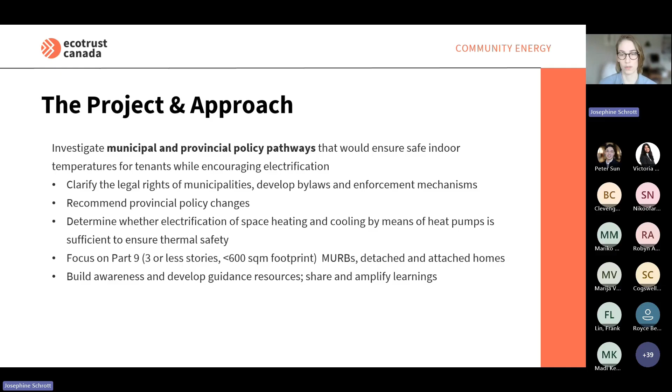And we did focus on Part 9, so smaller homes, small multi-unit buildings or single detached homes, just because there is also a lot of great work already being done on larger apartment buildings. And as mentioned earlier, in line with the fund objectives, we are looking to help build awareness and guidance resources and share that.

So this is looking very skewed to me, but basically our project was doing a lot of research to capture all that's come out since the heat dome around academic literature and learnings and studies, synthesizing that, and complementing it with expert interviews from various fields, particularly around tenant impacts.

Then we hosted a forum last year in the spring that had a session specifically on this topic, which allowed us to get further feedback from a diverse group of stakeholders. We sought input from provincial and municipal staff and elected officials, and then took all that to refine things.

And went into further details around the policy pathways. For each one, we looked at what's the status currently in BC and where it could go in future, what other jurisdictions are doing, and who has authority to move it forward. We looked more at municipal tools and started tracking action at the municipal level, since a few things were actually developing as we were doing this work.

And then this all went into the final project report. I can share the links in the chat after. We separately have an action tracker that we're keeping updated to track all the good work that municipalities are doing around this.

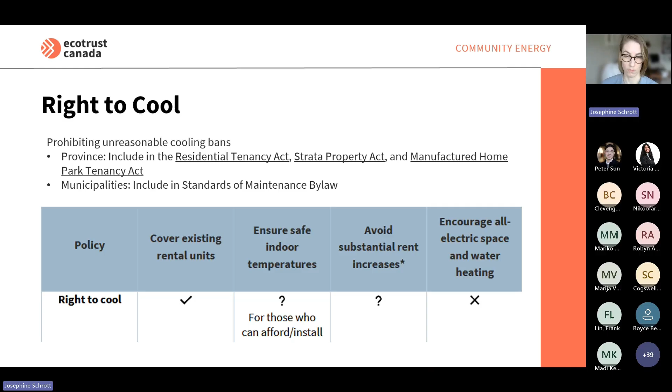Right now we're looking specifically at one of the key policies that has perhaps the most traction right now, which is the right to cool. That's really just prohibiting unreasonable cooling bans that folks face, both in rental units and in stratas and other setups. At the provincial level, the right to cool could be incorporated into the Tenancy Act and Strata Act, and municipalities can also incorporate it into their standards of maintenance bylaws.

Speaking of standards of maintenance, these broadly specify some kind of standard for healthy and safe housing. A number of municipalities in BC have those—not the majority, but a lot of them do. They're really an opportunity to include temperature limits. They all have minimum temperature limits or require some level of heating, so the idea would be to add a maximum temperature limit to require some level of cooling as well.

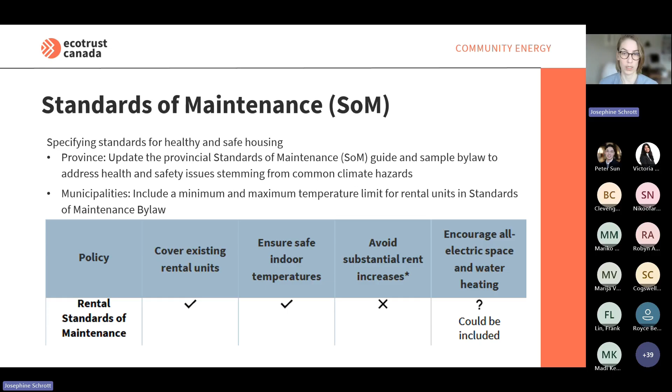The province is in here too because BC does have a provincial standards of maintenance guide and sample bylaw intended to help municipalities implement these standards. However, this provincial guide is from the 90s and really doesn't address the current climate-related hazards we're facing, so we're calling on the province to update it.

Other standards and codes that are a bit less directly focused on thermal safety or temperatures, but could also play an important role toward that goal in rental units, are, for example, the retrofit code and existing buildings renewal—really looking at how we can bring existing buildings up to better standards.

Similarly, rental energy performance standards, often measures that increase energy efficiency, will also have a positive effect on extreme temperature issues, particularly when done with those issues in mind. Then equipment standards, ensuring improvements at the time of replacing space and water heating equipment. The province does have highest efficiency equipment standards promised, but unfortunately not yet implemented.

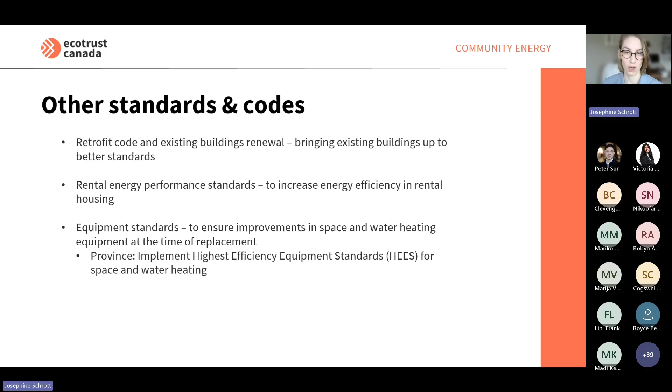A couple of things we thought were really important, particularly for filling data gaps and increasing transparency and information availability, include rental licensing.

We do have this at the provincial level for short-term rentals. The province could, for example, expand this to all rental units. Some municipalities have a licensing system, which gives a lot more information about where renters are, where the buildings are, and maybe what kinds of standards or maintenance issues can come up.

These are all kind of possibilities of tracking information and targeting interventions much more decisively and directly to the folks who need it most. Similarly, with energy ratings, these really help make visible some of these invisible elements of a home and provide better transparency for renters and buyers. This is something that the province could potentially require, and there's obviously an opportunity to include climate adaptation or resilience considerations in these kinds of labeling initiatives as well.

Just quickly on the province, we didn't get much enthusiasm in terms of our outreach to them. The Union of BC Municipalities resolutions on this matter also haven't really resulted in a meaningful response, and we do know that the province currently isn't considering changes to the Residential Tenancy Act or the Strata Act. It seems like they are currently willing to just leave the burden of proof and risk on individuals to make their case around the right to cool, rather than making that the default.

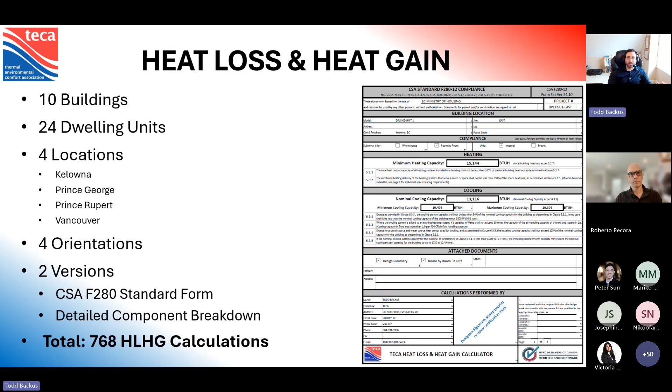Each of these 10 buildings has HVAC plans in 2 different styles. One has a centrally ducted forced air system, which a lot of us are very familiar with—you'd have your air handler in the middle of the room and your plenum with all your pipes coming off of it. I also included a mini split design that is separate.

The intent of that was that not all of these dwellings are well suited for a centrally ducted forced air system. Some of that is in large part because of how the walls are, and realistically where you're going to get the pipes up from the crawl space, because there's no mechanical room on any of the main floor or upper floor—the crawl space is basically your only mechanical room.

So that's really challenging when you have a 3-story building and you're trying to get up from the crawl space all the way up to the top floor.

That can be really challenging with a centrally ducted system and an open floor plan layout. So I went back and did the mini split system as well with an independent HRV for ventilation.

All of the plans are fully annotated. It has duct sizes, grill sizes, comments on where pipes are going or what they have to avoid. So it is quite detailed.

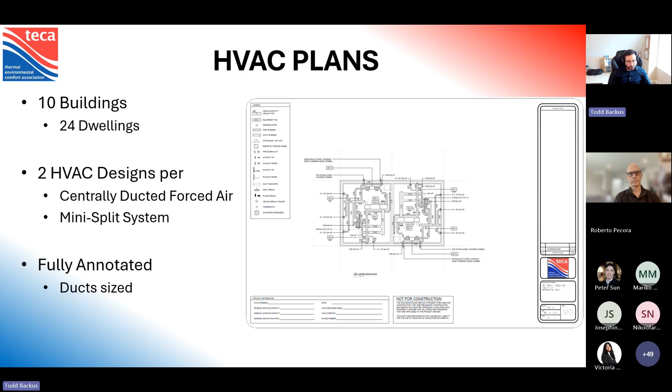All of these mechanical plans are drawn in AutoCAD. These plans will be fully available, as will all of the reports. All of this information is essentially open source. As long as you're not selling it, you are allowed to use it for whatever you like, even for education purposes. I'm just happy to see it out there and make it your own, promote it if you can, but use it.

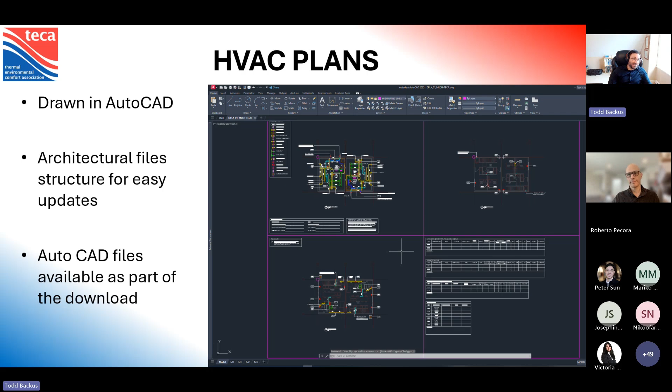The equipment schedules are located on the last page. And the intent with this is, if you are familiar with Part 3 drawings, this is really common where you'll have full equipment schedules actually on the plans.

But I find in a lot of cases on Part 9 buildings, especially when it's the homeowner who's managing the project, they don't get a lot of this information. And it's really critical to actually note this down so that you can show, are you meeting your heat loss and heat gain requirements? What are the electrical requirements of your equipment?

And then you can actually share that with the other trades, in particular the electrical trade, because there have been a lot of challenges historically in projects that are not well managed to get that communication occurring between mechanical and electrical. They should be on the same page very early in the project. And if that communication isn't happening, it can be really painful and expensive later.

So this is what they look like. I tried to keep them nice and clear and simple to read, as well as include all of that critical information, in particular for electrical coordination.

And all of the equipment on the plans is tagged as well. So it should be very clear to everyone what piece of equipment is what and where it is located and what its requirements are.

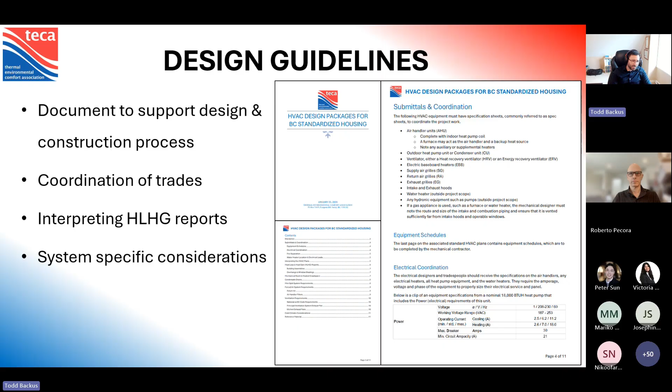Next steps on this project. I have previously spoken with representatives from the BC government about getting this information packaged together with the architectural plans. They were receptive to it, so I'm working on bundling that together because I want maximum value out of this. I want it to be very clear that when somebody downloads the architectural plans, they have this whole supporting package of HVAC design to go with it.

We are continuing development with BCIT. This is outside the original scope of the project, but I have some contacts at BCIT. They got really excited about this project, so they've actually helped out with it and lent me one of their EITs.

Basically what we're going to do is continue working on what happens when we bump up to step 5. BCIT actually hired E3 Eco Group to do a report, just to ensure that all of the architectural models and the heat loss, heat gain calculations all match step 3. In some regions these designs actually meet step 4 and EL4, but we do want to look at what happens when we go to step 5. So that would be another whole set of, what is that, 736 heat loss, heat gain calculations with tighter assemblies.

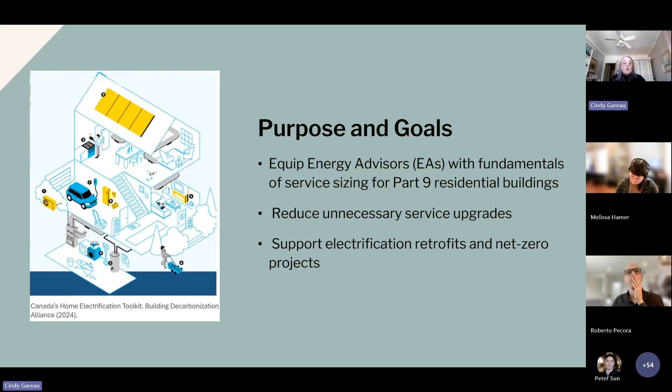So we actually brought together -- oh, I missed one. I'm missing -- oh, here we go, so I'm going to go to this slide.

What we did is we brought together energy advisors from across the country for an in-person pilot. But the goal of this training is to actually be able to deliver it across the country to an EA audience, but it could also be other people. We partnered with BCIT as the deliverer of this training. They are experts at what they do. And we were thrilled to bring together 16 participants, 15 were from BC and one was actually from Alberta.

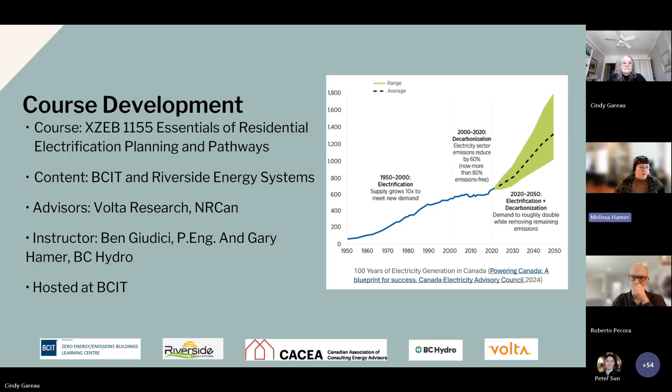Riverside Energy Systems provided some really great insights through Ben Giudici, and Gary Hamer with BC Hydro, and then Volta Research and NRCan was a really great supporter. NRCan provided some good context about jurisdictional scans of where electrification is across Canada with every province and territory, and what are the policy and implementation pieces around actually being able to do electrification and apply some of the planning pieces. So yeah, we started with that.

And as Cindy mentioned, participants. The course itself was over 2 days. We delivered it in person in our lab, and we really tried to focus on addressing some of the big areas in terms of what EAs need, as EAs are that key person involved in the integrated design planning process, and being able to bring up those considerations early on, knowing that that's the best opportunity to make these decisions and savings.

Also aligning with what NRCan came up with in their jurisdictional scan, looking at, let's explore at a very high level what are the Section 8 principles of the Canadian Electrical Code, which is national but implemented or interpreted differently across different authorities having jurisdiction. So there's still regional considerations, but we tried to keep at that national level, as well as provide some nuances of how it's being applied currently.

Looking at the service sizing and utility practices, so what is motivating a utility in terms of looking at smart electrical planning, and what is it actually, how is the service size, just some basic electrical fundamentals too.

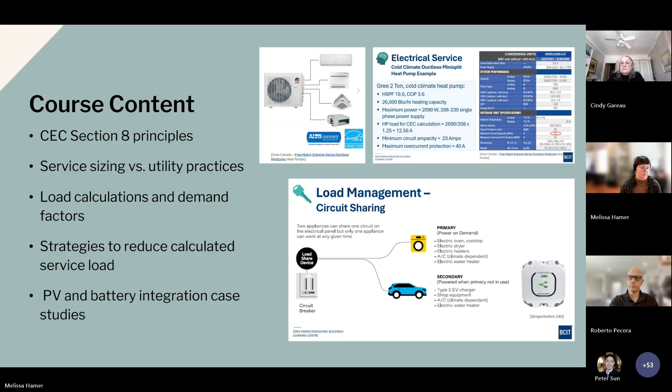The hands-on learning activities used those case studies, as well as we actually had some equipment in the lab, so people could look at different panels of different ages, and also look at some load shedding and EV EMS, or energy management system devices, to get familiarized with that.

The learning activities focused on analyzing utility data for peak loads, so within BC, pulling it from BC Hydro, how do you do that? If you're an EA, how would you coach the homeowner to be able to get that information for you? What do you need, and then how can you actually analyze that over that year span?

Looking at electrical panels, so being able to understand how do you read a breaker size, how do you tell what the service capacity is for that electrical panel. Looking at HVAC appliance nameplates, so if you're in an existing home, all that stuff could be there, how could you potentially put that information together. And then with the new builds and retrofits, being able to provide some real examples that they could sink their teeth into.

We also were able to get load control advice and a bit of a demo from Evectrix, which is working on a local project with the City of Vancouver, province of BC, and BC Hydro. That was really great to see an actual example of this being implemented with some multifamily housing.

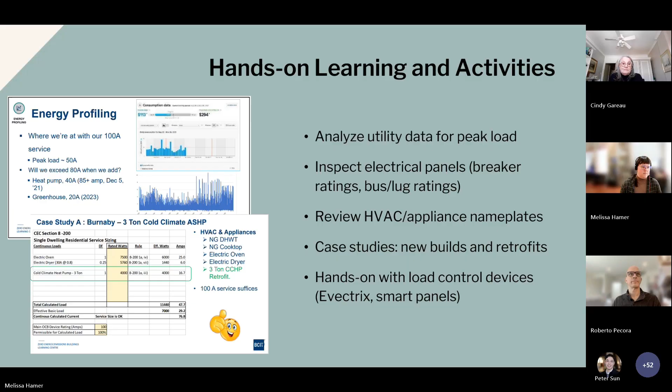Overall, the feedback was definitely very valuable. We handpicked the energy advisors, ones who had a variety of experience in the industry, but were in different regions, so we could get a good cross section of feedback, at least within BC. There were a lot of great questions, like being able to bring in their own actual projects they were currently working on, so the discussions were really in depth and quite helpful.

Being able to really honestly discuss the electrification challenges, and the knowledge they had over those two days, just seeing how much they would be able to apply that in the job the next day. They did say looking at more product examples and having some more manufacturer input would help.

One of the interesting things that came up, which is probably also a lesson learned, and there's work nationally to try to support this, is being able to actually identify how you would size a heat pump. So what are you looking at? What's the rating that you're actually looking at, and getting a bit more of a standard approach that way.

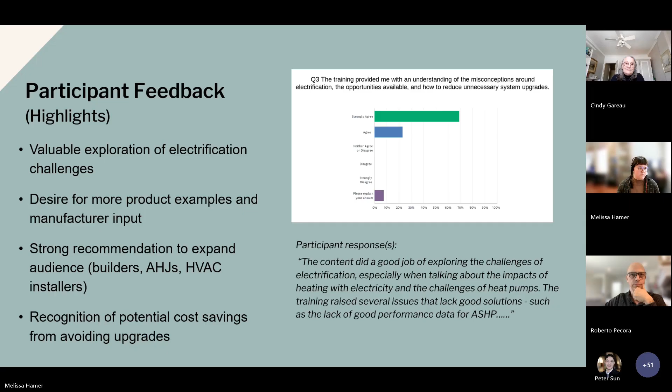And then, yeah, case studies. I think one of the most fun things, or the aha moment we saw in the two days, was we actually asked participants to pull their own utility data and come back the next day, and we put it up on the board, and we were able to see what was the service they had and what was the use they saw from their demonstrated load, and nobody exceeded that.

It was pretty, for the most part, there was quite a bit of amperage left. So it really highlighted what the opportunity is if this can be done at a larger scale.

And yeah, just the lessons learned: having more demonstrations of load managed devices, more access to the Canadian Electrical Code if needed, and just resources as well, expanding the assignments so that they can spend some more time working through the entire process.

And then the piece of electrical permit requirements, and even since the course, just seeing how interpreting some of these requirements is so different across authorities having jurisdiction. So one of the next steps we're working on is how do we try to support the work being done nationally to also support authorities having jurisdiction with understanding Section 8 and how this could support electrification.

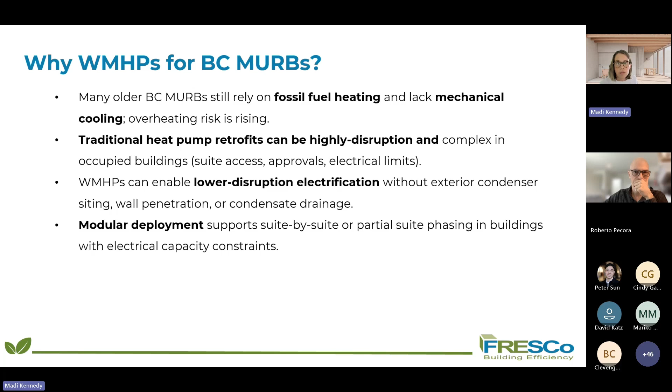Okay, so what is a window-mounted heat pump exactly?

There are two key brands that came out of the New York City pilot, Gradient and Midea. They're fairly similar, but a key feature of this technology is that it's factory sealed.

There's no refrigerant piping, no exterior condenser that needs to be mounted on a balcony or roof outside, which can be a really big challenge for some MURBs depending on the archetype. It can plug into a typical 120 volt outlet, and it doesn't require any condensate drainage on the outside of the building.

The challenge with these units is that they are specifically designed for sash windows, the vertical sliding windows.

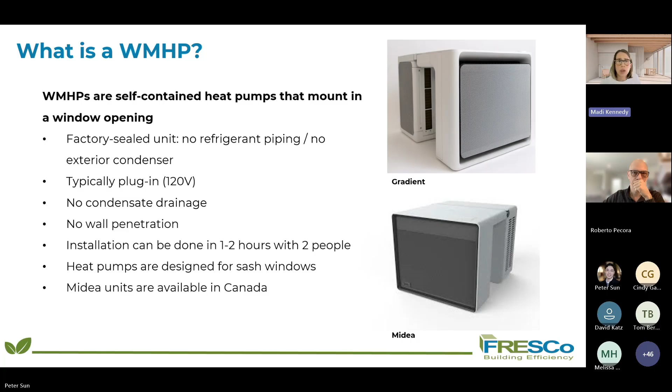One other note is that the Midea units are currently available to the market in Canada. They're selling for about $2,000 a piece, whereas the Gradient units are not currently available in Canada. They're only available in the US, and they're selling for about $4,000, so a bit more expensive.

I'm not going to get into all the technical specifications, but this is just to say the Gradient and Midea units perform similar to each other, and they also perform on par with a lot of cold climate in-suite mini split systems. So they are high performance equipment, and the size and ease of installation isn't really cutting into the performance.

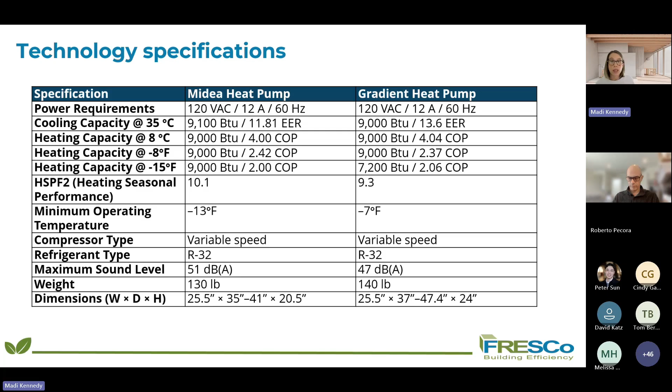As I mentioned, these units were developed through a New York City demonstration project. New York put out a call for this specific configuration of heat pumps and got back the designs from Gradient and Midea. New York has a lot of sash windows, so it made a lot of sense that they would design this particular form. Their first pilot was fairly limited as well.

They did 2 social housing buildings that were steam heated, totaling 24 apartments and 72 window-mounted heat pump units, 36 Midea and 36 Gradient. They have now done a full season of monitoring, both winter and summer, and have had really promising results.

They've had 87% energy savings and around 50% reduction in heating costs, and they've also had really high rates of user satisfaction. Now they're expanding this pilot to install several thousand more units throughout the state of New York.

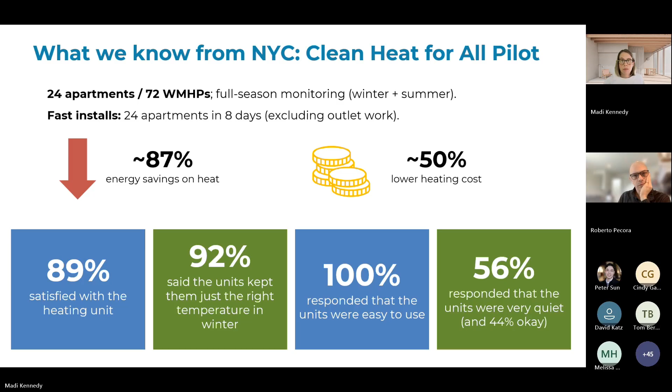Okay, so on to our pilot. Our pilot is really small, kind of a bite-sized chunk and a starting place, but we wanted to test out these window-mounted heat pumps in different common MURB archetypes in BC. So we are doing single suites in 3 different apartment buildings, for a total of 6 of the Midea window-mounted heat pumps across these buildings.

We wanted to test out gas and electric buildings, and we also wanted to test out buildings that did and did not require window replacements.

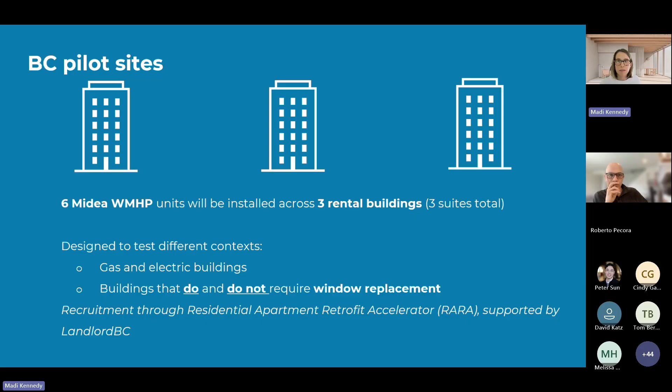As a lot of you know, or may be thinking, and it's often the first question we get when we start talking about this project, there's not a lot of sash windows in BC. It's not a very common window type. I would estimate it's probably less than 10% of MURBs.

So we wanted to see if we could make a replicable, package design where we replace both the window and install a window-mounted heat pump. Some of the guiding principles: we wanted it to be high performance, replicable, and customizable to match different aesthetics and window types. We also wanted it to remain functional if we needed to remove the heat pump for servicing or permanently remove it for any reason. I don't have a picture of the window design yet as it's not complete.

I did want to show this picture on the screen as an inspiration image. You can see on the bottom, the window has a panel with some mechanical venting through it. That's the idea we're using for our window design. The heat pumps will go into a small panel at the bottom of the window, slot through there, and can be removed through that panel. The panel can be replaced by glass or an opaque panel if the heat pump needs servicing or removal. That allows the top portion of the window to be operable and to use any type of casement, awning, or fixed frame.

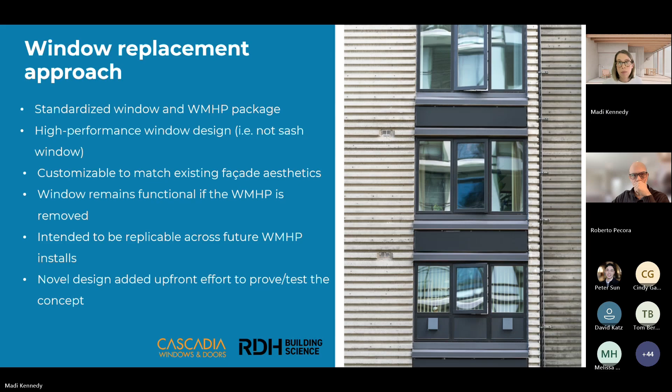For the sake of time, I'm just going to briefly go over the pilot sites we've selected and our approach. As I mentioned, the installations haven't happened yet, but we've completed the selection and design. Our first one is a New Westminster building.

It's a 3-story low-rise wood frame building from 1928. It has central gas hydronic heating, and it also has electric baseboards. This is a unique building - their gas system stopped working a number of years ago, so they installed electric baseboards in all the suites and did some electrical upgrades at the time. Then the gas system started working again, so they switched back to gas. So what that means for us is that it's a gas building, but the electrical system is ready for electrification.

So we're not having to do any major in-suite or building-level upgrades. This building is our one sash window building as well, so we're not having to do any type of window replacement here. We'll be installing 2 window-mounted heat pumps and also 1 small electric baseboard. The heat pumps will go in the living room and the bedroom, and we'll do a small electric baseboard in the kitchen. That's because the kitchen window is a little smaller than the other window, so it can't accommodate the window-mounted heat pump, and the kitchen is enclosed with doors. So we want to make sure that if the kitchen doors are closed and the oven's not on, everything remains comfortable.

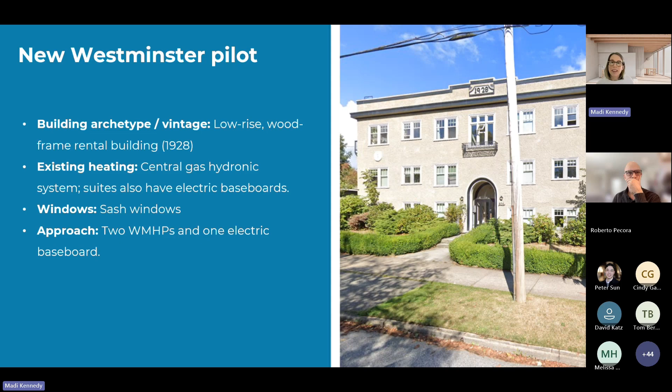Our Vancouver pilot is another older building - a 4-story, wood-framed building from 1906. This building is currently used for student housing, similar to an SRO in that they have micro suites with no bathrooms and no kitchens, just a very small room with a bed and any other belongings. It's currently heated with a single baseboard per unit. For this building, we only need to put in 1 window-mounted heat pump to fully transition the heating system over for the suite.

This building also has sash windows - you can see the bay windows. The exterior panels are sash, and the middle one is fixed frame. The exterior ones are a little too small, so we're actually going to be replacing the center window as well as putting a heat pump in there, and we'll be doing a suite at the back side of the building.

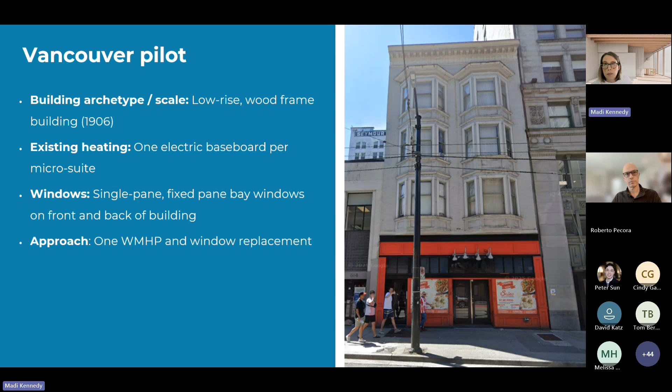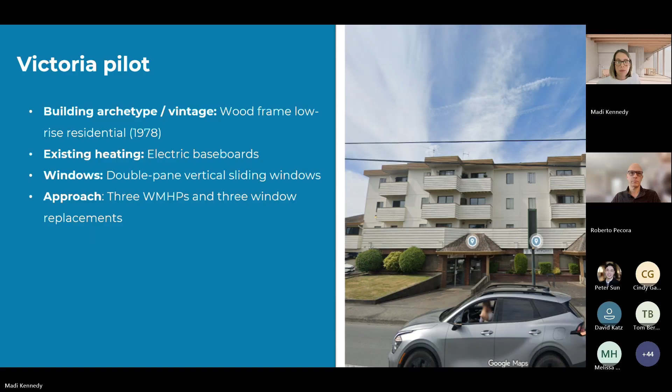Okay, so what we've learned so far. We looked at a lot of different buildings before landing on these three. Some owners dropped out, some we had to eliminate for different reasons. But we found the most and the least promising archetypes for MURBs.

The first one is buildings with sash windows. We know they're obviously a great fit. They're not a common archetype, but they definitely do exist, and we've seen a lot of them around. So for these buildings, getting window-mounted heat pumps in is a no-brainer.

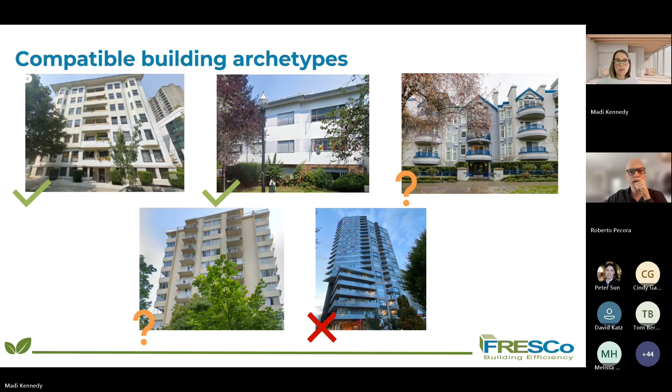Okay, so the barriers that we found—a lot of these are probably pretty common for electrification and retrofit projects generally, but I'll briefly call them out. Window compatibility is fairly specific to window mounted heat pumps, but it's not just about sash versus non-sash windows. You also have to consider the window opening and sill size. Some buildings, especially older masonry ones, had sills too wide to accommodate the window mounted heat pump, and that's not really something you could change.

Balconies, overhangs, and awnings also need to be considered with this technology. Electrical capacity was another barrier—anytime you're looking at a gas heated MURB, electrical capacity comes into question, and this technology doesn't avoid that. It's the same kind of challenge, though the benefit here is looking at modular deployment and seeing if you could do a partial implementation within the building's existing electrical capacity.

Another challenge we ran into was asbestos. A couple of the MURBs we looked at would need asbestos abatement before cutting into any walls, which can be a significant undertaking and not something all landlords are willing to do.